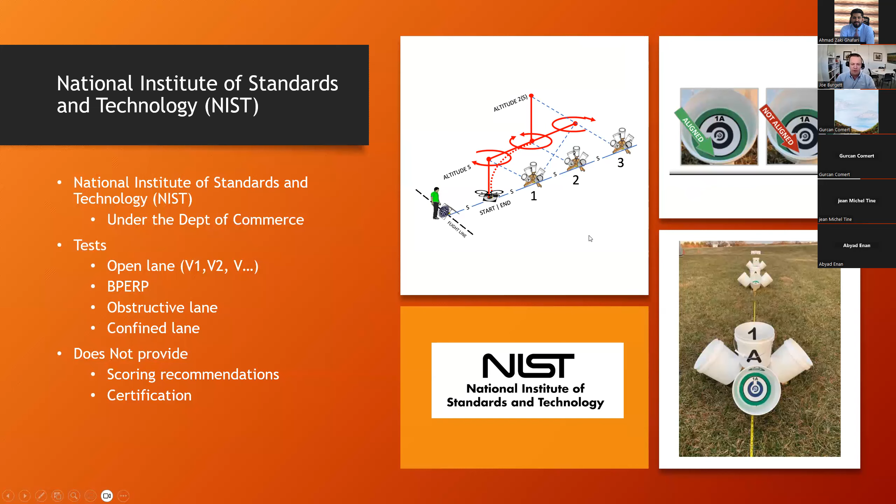Now, while this is a great test, it's been well proven, it's used all over the place. I've administered this test hundreds if not thousands of times. It's a great test, and it works out well for our purposes. But there are some disadvantages of this test.

One of the feedback that the FAA got when they initially released the Part 107 rules was this knowledge test was cost prohibitive. It cost, at the time, $150. It's increased to $175, but at that time there was pushback by the drone community saying, look, that's too much. That's too much money that we're spending on that.

Well, they were overruled. It came out anyway, but that barrier is even more so, and that's one of the reasons there's not a proficiency component to the license now, because now, instead of just going to a standardized test site with standardized computers set up for standardized tests, you would then need to have a flight proficiency component.

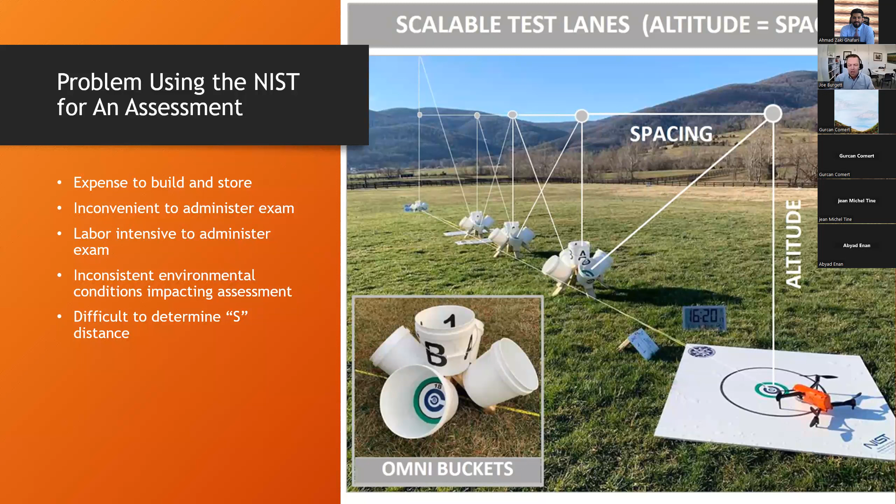You would need to hire a proctor. Somebody would need to build these apparatuses. Someone would need to store these apparatuses. Someone would need to set them up periodically, administer the exam, grade the exam, certify the results, all of those things that go along with it, which I don't know what the cost of that would be. It all depends on the scenario and volume, but likely it would be more than $175. If there's already pushback on that, that's an issue. So good test, but just the nature of proctoring tests creates some barriers and limitations.

One of the things that we did look at, and I won't spend a lot of time on this because it turned out it really wasn't that big of a deal. As I mentioned before, and I'm going to use my laser pointer here to illustrate this, one of the NIST components is that all of these apparatuses are in units of 10 feet apart, and you're supposed to fly 10 feet tall so that all the geometry works out. For example, if you're 10 feet away, 10 feet in altitude, and you're aligned with this bucket, then this angle here should be 45 degrees, and it works out well.

It's a little bit of a limitation, but again, it really is not a big deal. What the test is really commanding you to do is maintain a ratio. While this works if you're 10 feet away and 10 feet up and perfectly aligned looking down in that bucket, what happens if you're 20 feet away and 20 feet up, or 50 feet away and 50 feet up? You might be wildly out of position, but the ratio is right. You can stare down and you can still see that green ring.

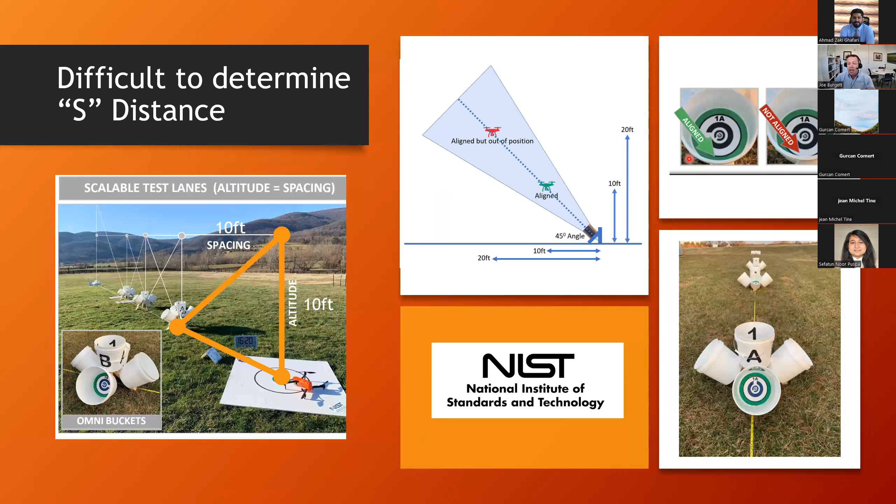Again, that's a limitation with the test. It's an acknowledged one. We did some experimentation with a whole bunch of test takers. It really wasn't a big deal, so I don't want to make it sound like a bigger deal than it is. But it is a limitation to in-person testing. You can kind of proctor it a little bit, but knowing the exact position of a drone by eye is very difficult to do. So our solution to this was to put it in a simulator.

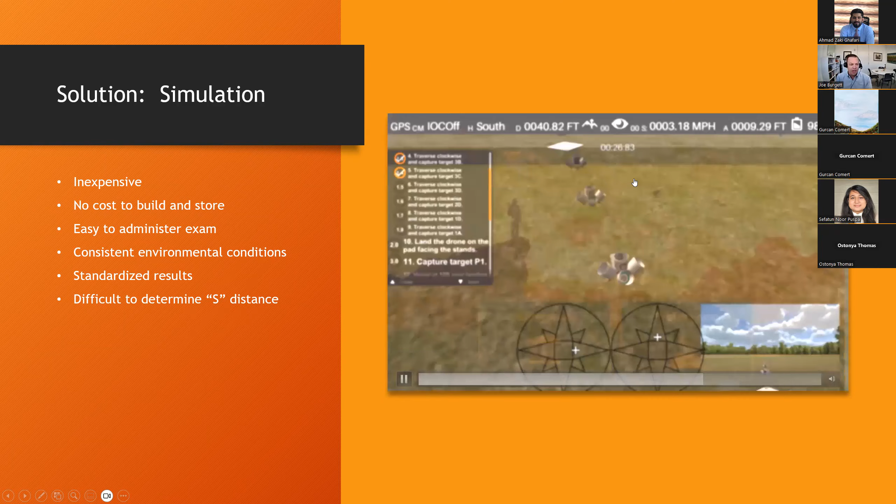All right, so by taking those buckets and the dimensions, and there was already software available that had excellent physics for some of the most commonly used drones that were out there, we put it all in the simulator through some industry programming partners. I'm not a computer programmer, but we put it together and we put it in the virtual world. And this eliminated a lot of the barriers that were associated with the in-person testing. It's not expensive. I mean, there was some cost to build it, but once it's built, it's built.

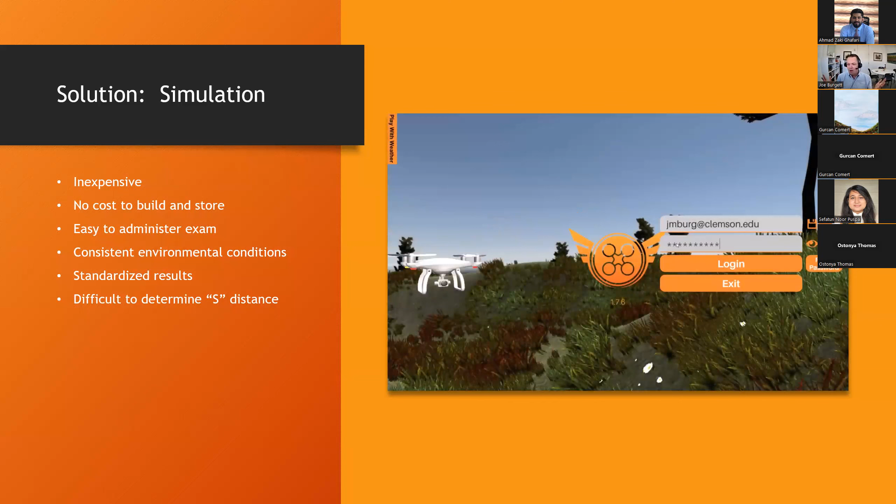And for DOTs, because this software was funded by a FHWA project, all DOTs have access to it at no cost. So there's no cost to build or store the software other than a minuscule amount of hardware space. It's easy to administer the exam because it's part of the software. You don't need a second person to observe you taking the test. The computer does it.

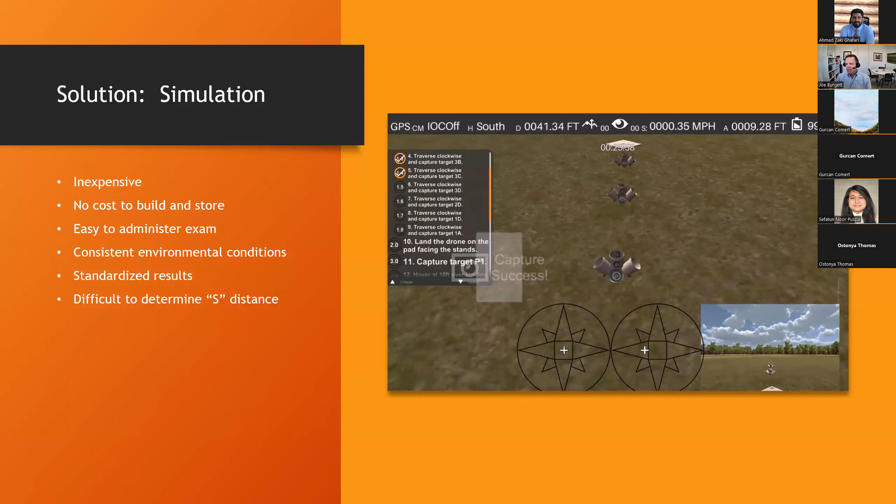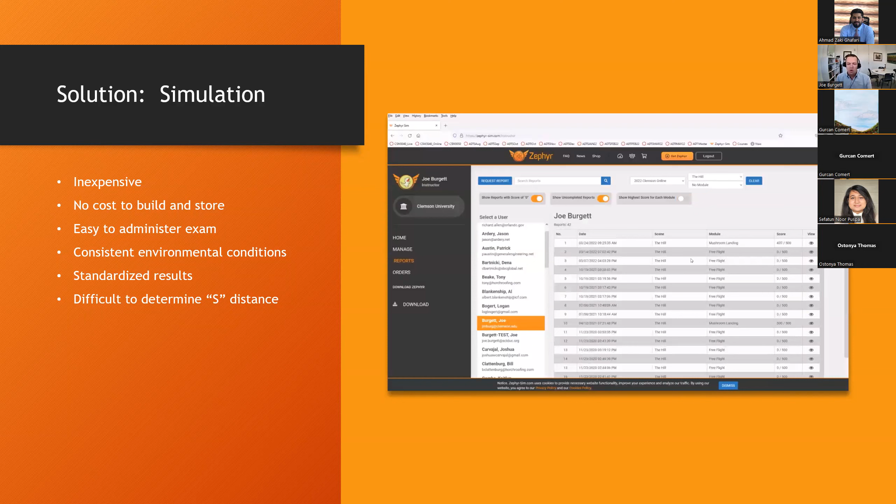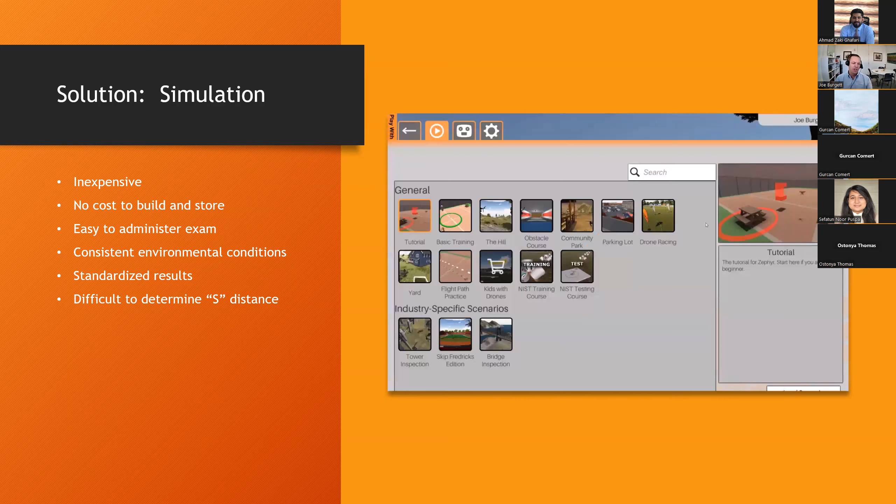Consistent environmental conditions: complaint's too strong a word, but a legitimate concern I hear from students when I use this test to assess their flight skills, where they're benchmarked against nice, calm, sunny days. Well, what happens if they take their exam when we've got 15 knot winds or something? Is it fair to hold them to the same standard with higher wind conditions or intermittent wind conditions than not? In the simulator, you can standardize environmental conditions, and it auto grades, which is very, very nice.

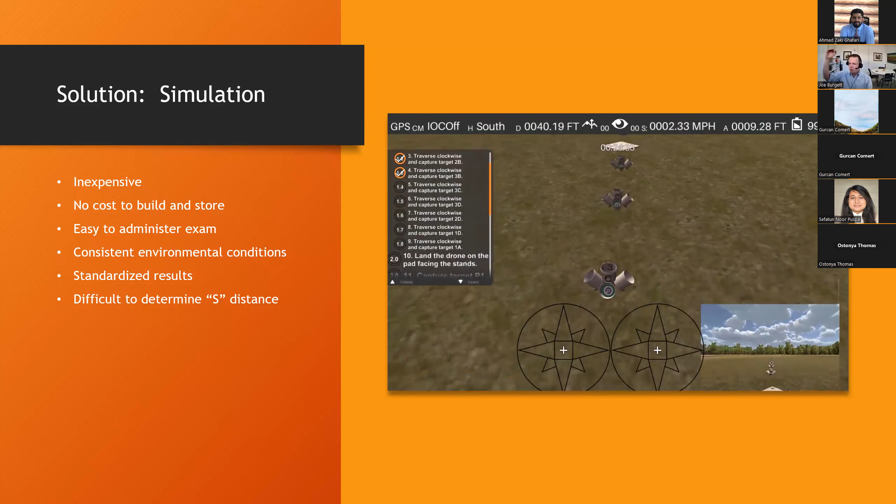And that distance issue I told you about, the ratio being where you could be wildly out of position but still be able to see the target. Well, because this is software, we know exactly where the drone is in the virtual world. We can embed tolerances, which is what we did. If you're more than 3 feet away from where you're supposed to be, either horizontally or vertically, even if you can see the target, we don't award points for that. And again, that's something that you can easily do in the software world.

As I mentioned, one of the most significant advantages for the DOT is because this was funded through STIC incentive funds through the Federal Highway Administration. They funded it, and as part of that agreement, we made concessions that the software is available to all DOTs at no cost. So it's a great tool to have in the DOT toolkit, even if they don't use it for assessment, but just for training purposes, and even if you're not a big believer in simulation, it's a great way to start.

If nothing else, it's a way to get you started, learn some stick control, learn how your thumbs work and how they operate a drone before you invest the time and money and potentially hardware and going out in the field without knowing how to operate it. Now, a simulator sounds all great and wonderful, assuming it works, right? And when I say assuming it works, not the software or the programming side where it crashes or doesn't turn on, or is not compatible with Windows or iOS or whatever. What I mean is it's a fair comparison to in-person flight.

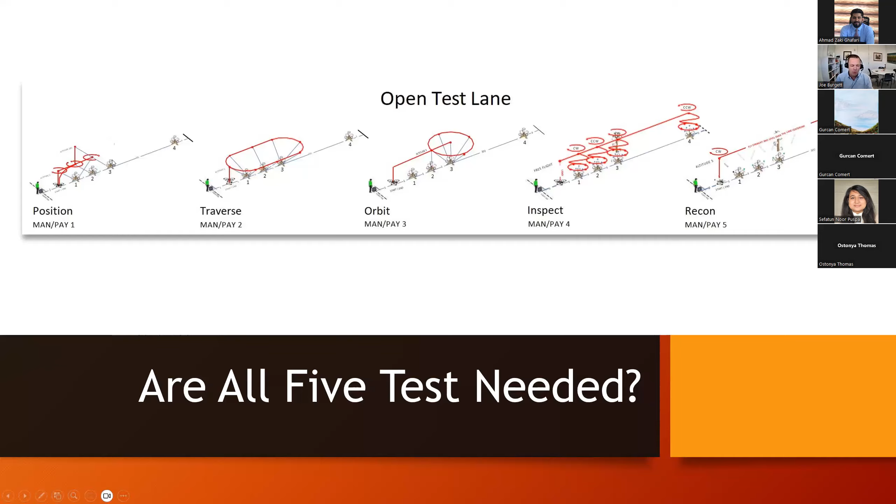And that's all well and good. And that's a good basic proficiency test. It's got the word basic built right into it. So I won't give it too much of a hard time, only to say that it's pretty easy. I would say that if you're new to droning and you come out with me for a couple hours in the field with the drone, there's a good chance that you could pass the BPERP after 2 hours of experience. Maybe not everybody, but you're kind of getting the feel for it.

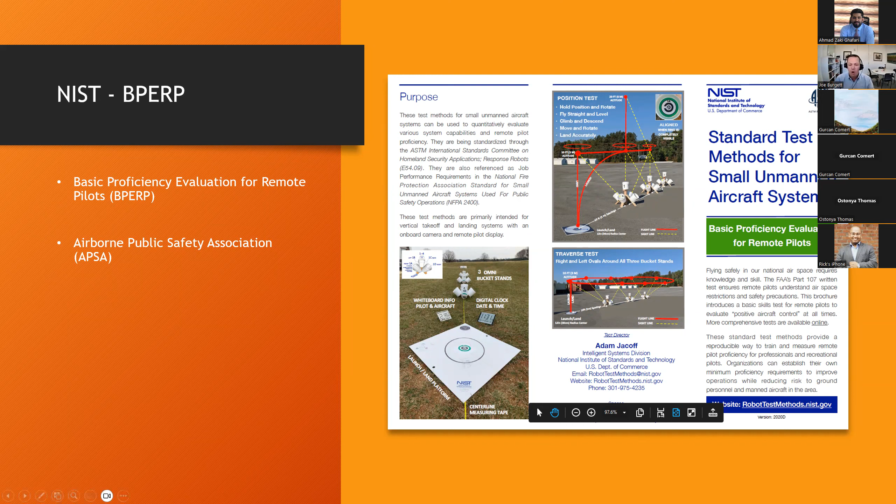So it has value, and it's what NIST pushed. So there's an inertia on our side to want to use it as well. And we did a bunch of experiments to it as well. So we kind of go back to this whole idea of, okay, NIST has this test lane, this series of apparatuses, and they have these 5 maneuvers, okay? And the experiment question we want to ask is, do we need to do all 5?

Or at some point, are we at a statistical level? Can we get by with 1 or 2 or 3, whatever, and be able to say that, look, we are assessing stick skills adequately with not all 5 of the maneuvers, but maybe 1 or 2.

So what we did is we ran some statistics based off of all 5 of the tests, using that as our dependent variable, and started looking at each of the individual maneuvers as independent variables, and then did a fitness test to see how many of these maneuvers, what kind of reliability we could get. And we found basically if you just use a single maneuver, the predictive power ranged anywhere between 0.7399 to 0.9177.

So pretty good, really. So what we found is if you just use one of these maneuvers, whatever you get on that maneuver, you're not going to get a lot more predictive power of how good of a pilot you are by doing more tests on top of that. However, when you add more independent variables, you get a better predictive power.

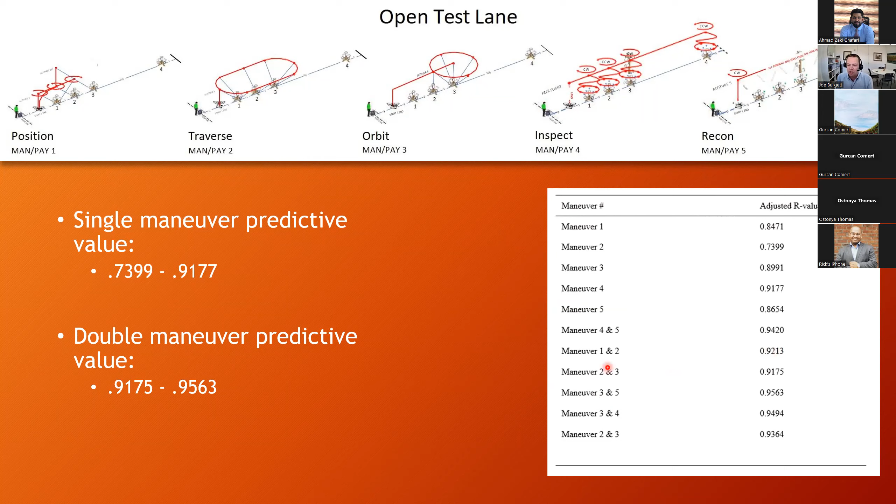We found with our sample that if we were to do it all over again, if we were to use maneuvers 3 and 5, the predictive power would be a little bit better with our sample. But all in all, there's something that's already out there that's working. NIST is already pushing the BPERP. It's pretty close anyway. We're not going to upset the apple cart. So we stick with the NIST, and are moving forward with that.

So again, this is where we're focusing on right now, okay, is aircraft control. You got these 3 different fields that define flight proficiency. General knowledge, that's the Part 107. Aircraft control, that's your thumbs. That's what we're doing with the simulator. And then field operations, I'll get to in a little bit.

But right now for aircraft control, based off of our sample, we came up with our own evaluation, and we did it by percentiles, based largely off of people that took my class. Really, those were the folks that had 10 to 16 hours worth of flight experience, how well they did. So we found that if they could complete that BPERP test with a perfect score in 5 minutes, you were in the top 10% category. That was an A grade.

If you were able to complete that BPERP in 6 minutes with a perfect score, you were in the top 20 percentile. That was a B grade. And then of course 7 minutes, C grade, 8 minutes, D grade, and then 10 minutes is what the BPERP is. So again, it's fairly easy.

What we found really was the scores were not a good discriminator of proficiency, because if you're going to get the test, you're going to get it right. Can you see the green ring or not? If you can't see it, then you're still going to fly around until you can see the green ring and then take the picture. So really, the points weren't the discriminators, it was how quickly you could line them up. So time was more of a factor. So that's what we've found.